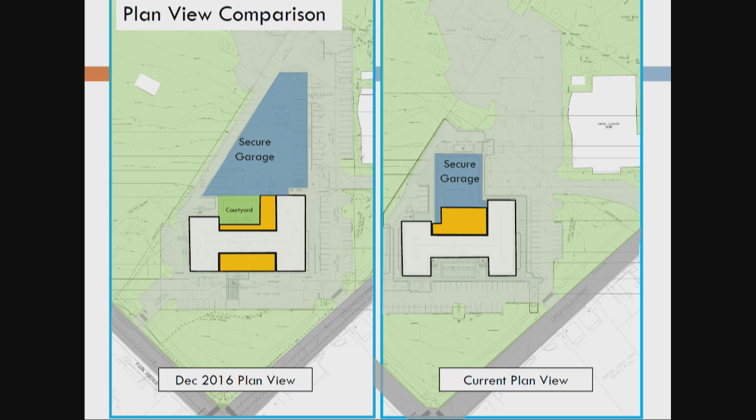So we really do have the current design that meets the original project goals. We haven't sacrificed any of our original safety or security priorities. We maintained the original program, meaning the departmental space needs within the different departments of the city, and also maintained our public meeting spaces, maintaining an open central entrance and central lobby area. We're maintaining this historic city hall frontage and aesthetic because we're no longer adding this addition in the front. We're maintaining these 2 public elevators, and we're minimizing the impacts to Cherry Hill Park. So to reiterate, this newest design still meets the project goals, still meets our current and projected space needs, and is within budget.

Before I talk a little more about the updated design, this is the second round of stakeholder outreach, or third round maybe - this has been a long project. We went back to council to show this concept off on May 22nd, and then we submitted a site plan on the 30th. We had a public safety task force, consisting of public and internal stakeholders, review this building on the 5th. We brought this to the Architectural Advisory Board last night, and we're here tonight, and we'll continue to update the website too.

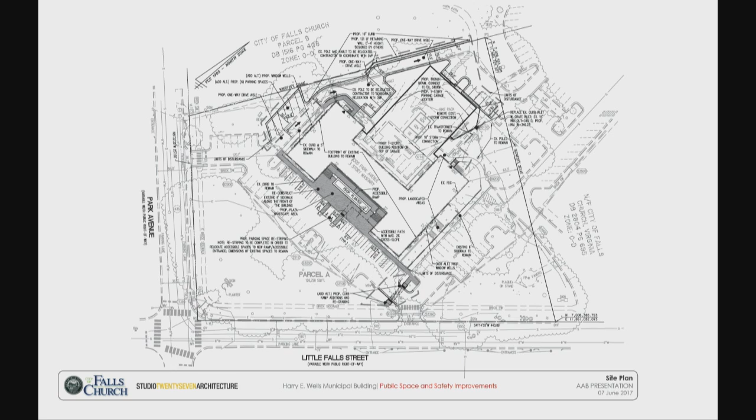This is the site plan we submitted. Here you'll see the existing building, with this as the front. What's happening now is we're adding an addition in the back, which is a two-story building addition, and on the bottom is the parking structure.

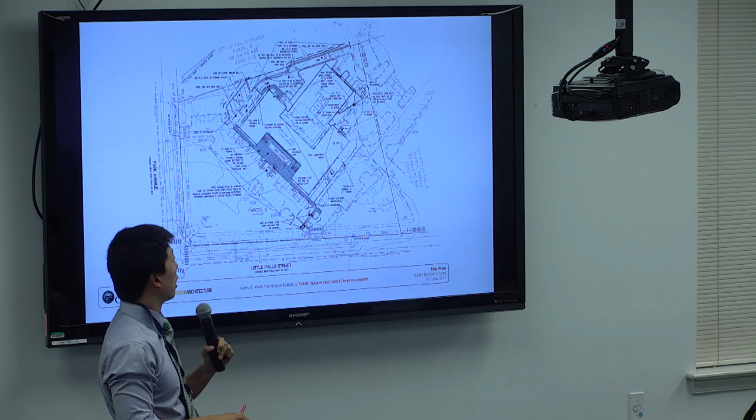The concept right now is to gut the existing chambers area, and that will become your front entrance area where you walk in. Let me see if I have a floor plan. This is showing from an elevation view the rear, and let me see if I have a floor plan.

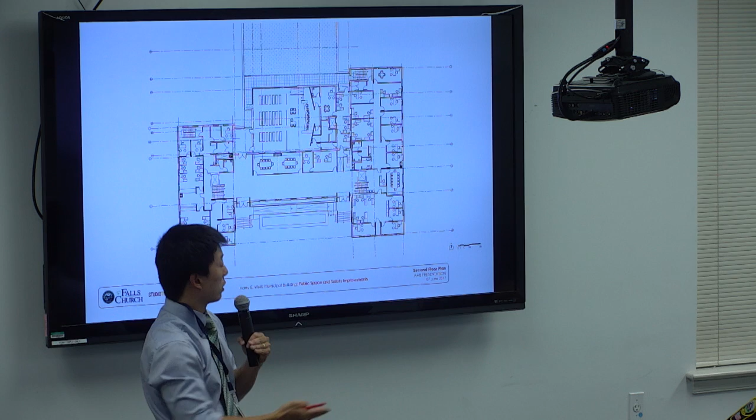To orient everybody, this is the front of the building, this is the floor plan, and this is the rear. This is the existing chambers, which has now been completely gutted—that becomes your central front entrance area. You enter through the existing two front doors into the central lobby area, and in the rear we'll be building a new chambers. That new chambers will also include the sheriff's department and the elevator for secure wayfinding through the building. There will be an elevator back here that goes down to the holding level, for prisoner exchange and judge exchange—the judge can move securely through this elevator.

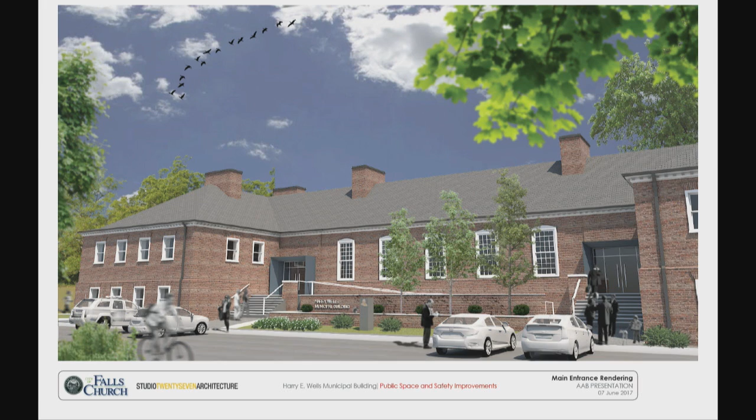So how does this look from the front? Essentially we're maintaining the existing front aesthetic of City Hall—no real change here, no major change. What we are doing is adding in the front an ADA ramp with a short wall to block that from view, and a small seating wall. The existing doorways will be maintained, except we'll update them for ADA width and for LEED, so it's kind of like an airlock system. Otherwise those two existing entrances are maintained.

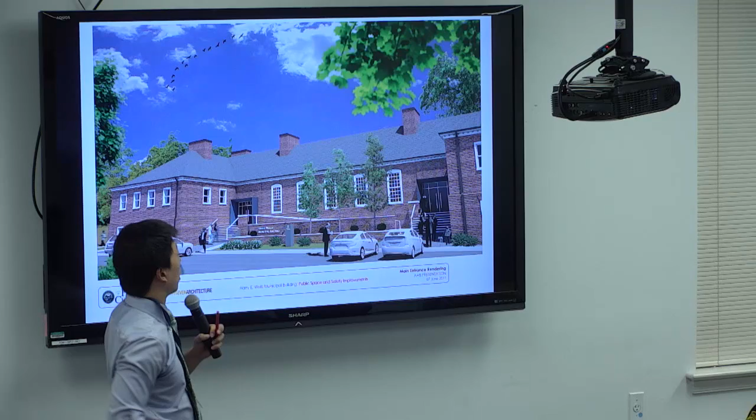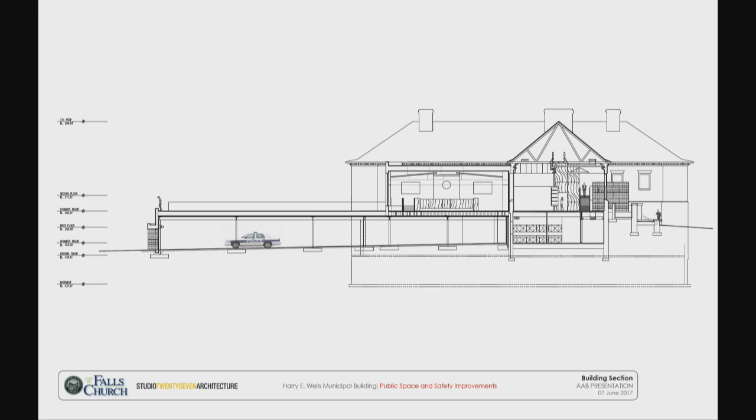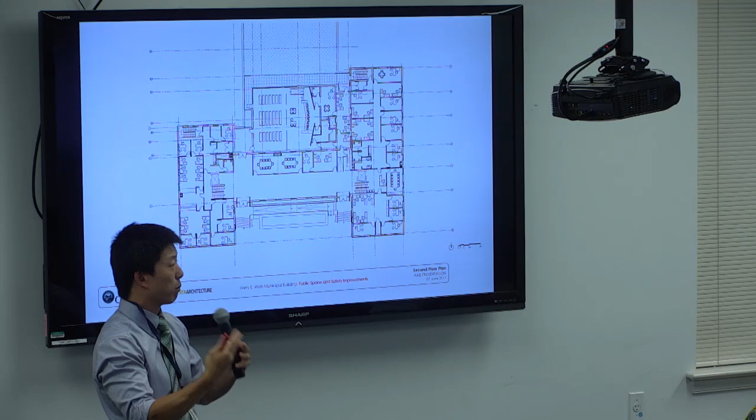Going back to the floor plan, part of this concept is that you come into this lobby area. To your left and right are these stairwell and elevator sections, and directly off of them are lobby areas where the public accessing city services can go up the stairs into a lobby, with your public counter right there—versus what we have now, where you find your way through hallways.

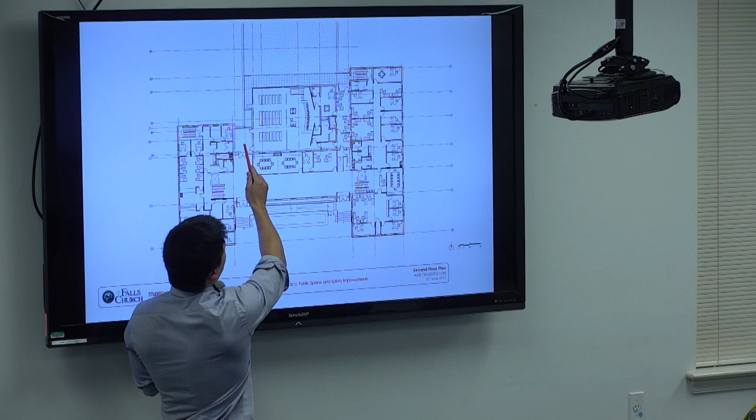In addition, in the front lobby area—I'll flip back to the interior view in a minute—you'll have public meeting rooms right off the front entrance. You'll come in, public meeting rooms right here. If you're accessing court, you'll come in, security vestibule up here, do your security check, and then enter court. This view shows the two public meeting rooms off the front, giving an idea of what we're envisioning for the lobby area.

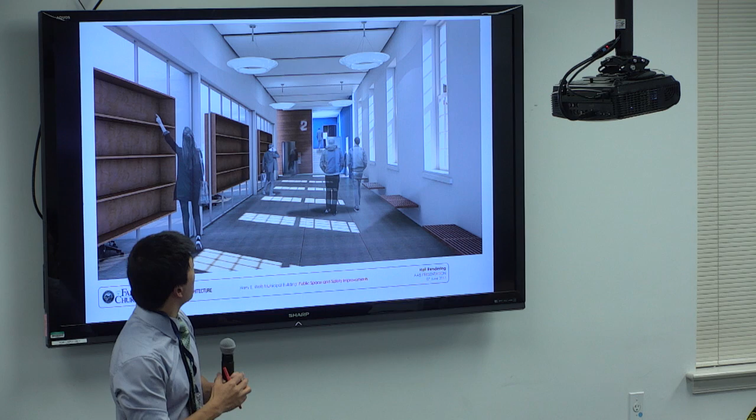And James, if I can note while you're on that one—this is a preliminary rendering, so the finalization of bookshelves, walls, and stuff is still early in the process. This is to give you an idea of what the functional use of the space would be.

So what does this mean? What does it look like in the back? This is the addition that's going to happen in the back, our new chambers, our new sheriff offices, and the transport system that essentially is secure transport for the judges, the courts, and the police.

In the back here, you have a secure garage where the police, sheriff, and judge will be able to come in. That will connect to the Sally port, which connects to holding right there. From holding, you'll be able to take prisoners up securely into court. The judge will also have secure parking and be able to go up securely into court. Everything's enclosed, nothing's like we have right now out in the open.

The top of this will be able to be kind of a green roof terrace area. We see that as being used more as a public space. We're working through how the security and access would work for this top area. Right now, the only access would be through the existing building, so there would have to be something set up to maintain the security of the courtroom while allowing the public to use this. So this could be something like weekends or non-court day use.

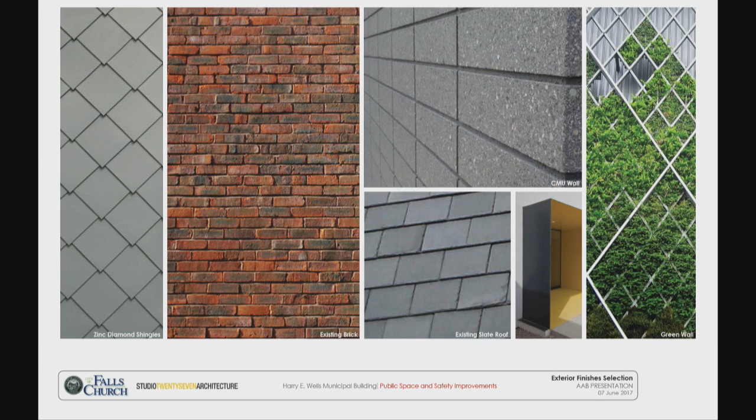What we're bringing into this new addition in the back is things like this CMU wall, a green wall, and zinc diamond shingles, which you're seeing on the wall here, and this would be our CMU wall. We're looking at something that really maybe complements the existing building but doesn't copy or mimic it.

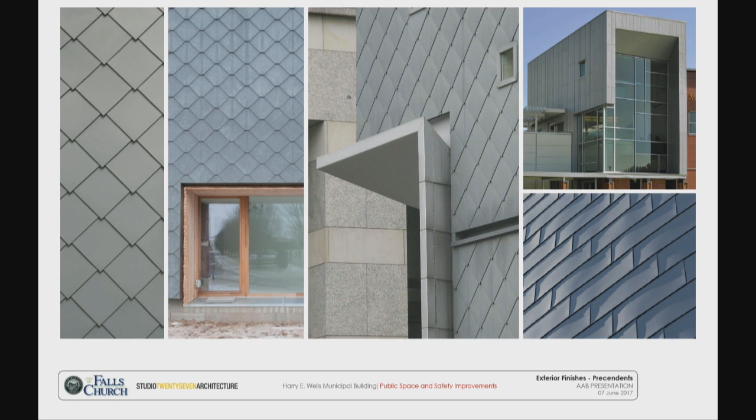These are just a few more real-world examples and different ways that texture on the rear chambers could be visualized or installed. Right now we are going for this kind of more horizontal look that you see here. We feel that matches the brick horizontal.

Then these other elements we're looking at are the framing for the entry doors. We do have to update the doors for ADA clearances and things like that, so what do we do when we're updating those frames? We're looking at something very subtle that will match the existing brick there.

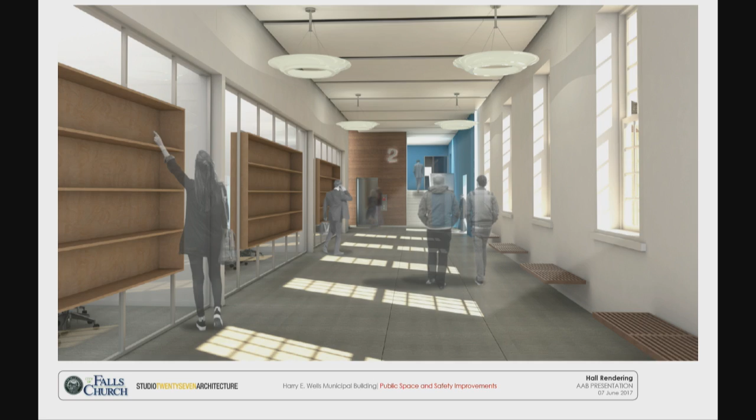At this point, I think I'm done, and I'd like to open it up for questions, or I don't know if Rick or Cindy have anything to add.

The new design has been scaled back some. While we do lose some of the parking spaces in the back, it does retain all the security issues that were brought up and addressed by the Marshals Service and the other studies done in the past that raised the security concerns to begin with. So while the project has been scaled back, it does still retain all of the same security benefits that we were looking for at the beginning of the project, and it clearly assists with wayfinding.

As far as wayfinding is concerned, currently with all the entrances to the building, our records clerk ends up being a tour guide for part of her time during the day. People will come in trying to find an office, she'll try to explain how to get there, and after seeing a confused look on somebody's face, she'll offer to get up and escort them to where they're trying to get. So this clearly makes a lot more sense, and again, it retains the wayfinding positives that came out with the initial design.

I could either be formal and have you come up to the podium, but I'm thinking I'll try to bring the mic around to people and just let you comment and question.

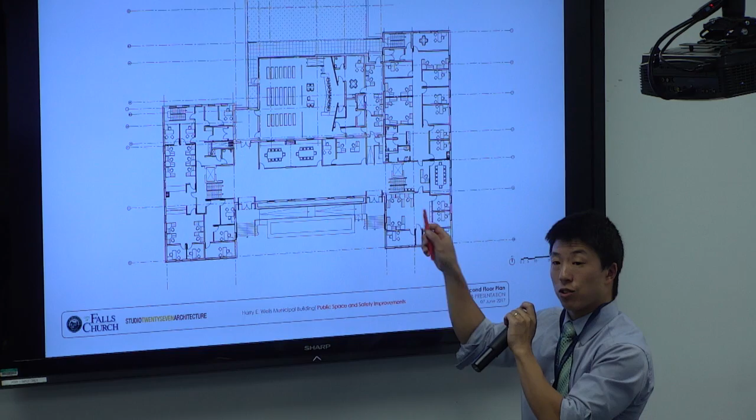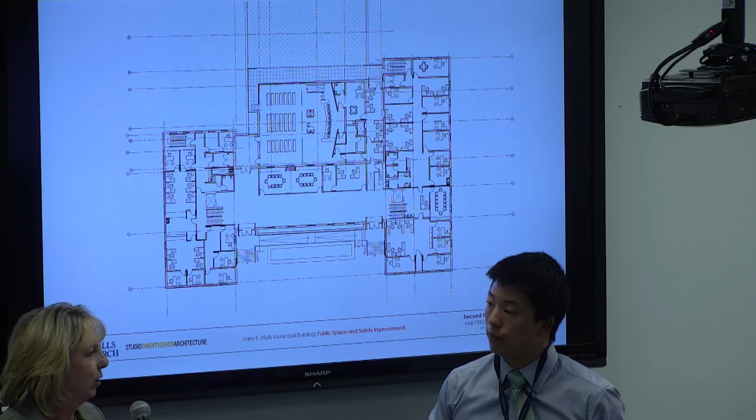Just one final question, what does CMAR stand for? Construction manager at risk—it's a performance Virginia procurement tool that one can use. What happens is you bring the construction manager on board up front at this design stage, so they're really involved. The guaranteed maximum price James referred to is a negotiated piece. The risk part is once they've agreed to that price and the contract's been awarded, they bear the risk for any overruns or anything they didn't project.

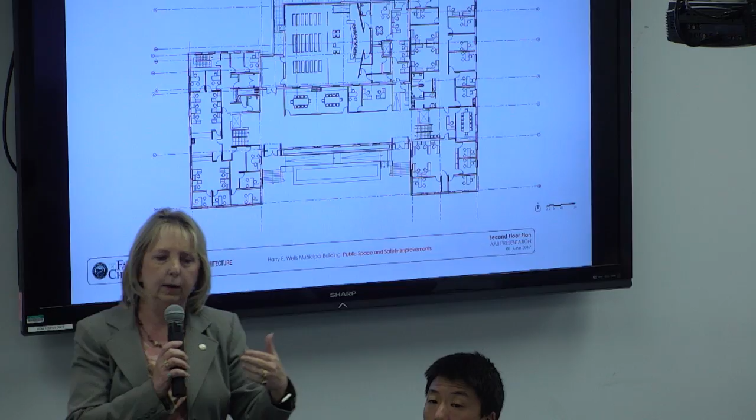So the only change orders are ones initiated by the building owner, because of unexpected things or changes to the design. I do want to follow up on the point about coming down to the police. There would be a lobby and dispatch, and that's for after hours—we're working on the procedural piece. There might still be a buzzer here that the police would see and let you in, so it has a bit of security control. But one of the things with this building design, James talked about lobbies at this counter and some meeting rooms. You can see we have a lot of doors that can secure the suites off, so after hours you control where the public goes, which is safer for the public and also safer for anybody else in the building after hours.

Are there going to be solar panels or other energy-efficient, environmentally friendly things in this building? Sure, yeah, so we are doing LEED Silver as council policy requires. We will have more efficient HVAC systems, more efficient lighting. As far as solar panels, that's just not in our budget right now, but I think overall the operational costs of this building will drop because of the updated equipment we're putting in. We've gotten some additional estimates through the Environmental Services, Sustainability Council—new name—so they could see what we looked at with some vendors, what we could do for solar panels. The back is not where the sun is, so it's a little harder to do that, but they've come up with some options if we can pursue a grant or separate project. We wouldn't preclude that, but we'll be sustainable in many ways, just no solar panels initially.

Great question. Yes, let me go to John. Excuse me, I have a problem with my voice right now.

If I understood correctly, in October the town hall meeting for the original project had an estimate of about $13 million, and then in 3 or 4 months it went up by about 50%. Could you explain why that happened and when the city council found out about that change in cost?

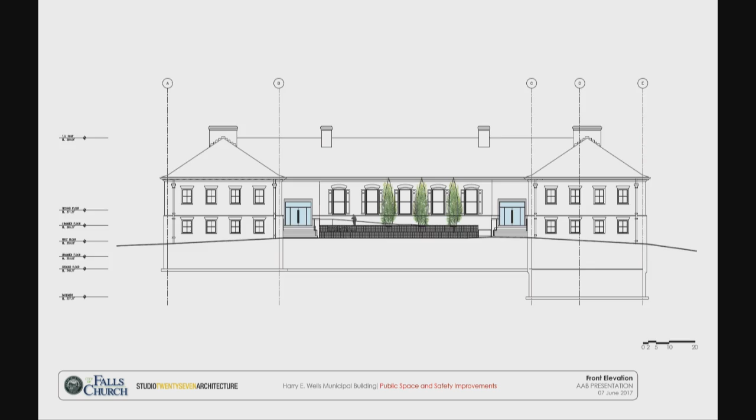What's majorly different is that you'll have a direct line. So now if you can do the floor plan. Here, if you could point to the direct - so now you have a direct alignment to it, and visibility. So it's a much better wayfinding and a direct axis alignment, but you do still have the half up, half down, and only the meeting room space and economic development office on that floor.

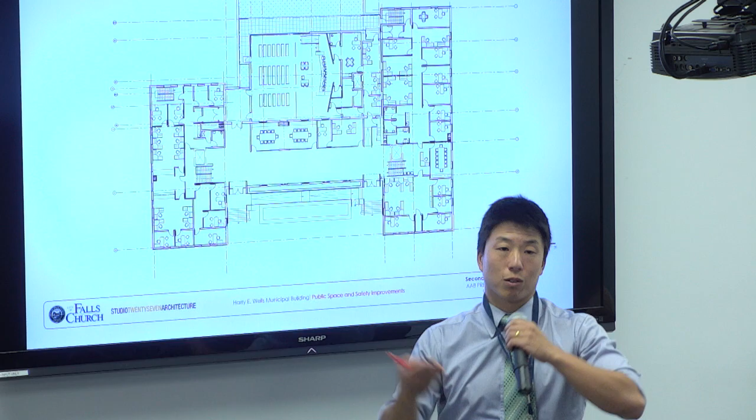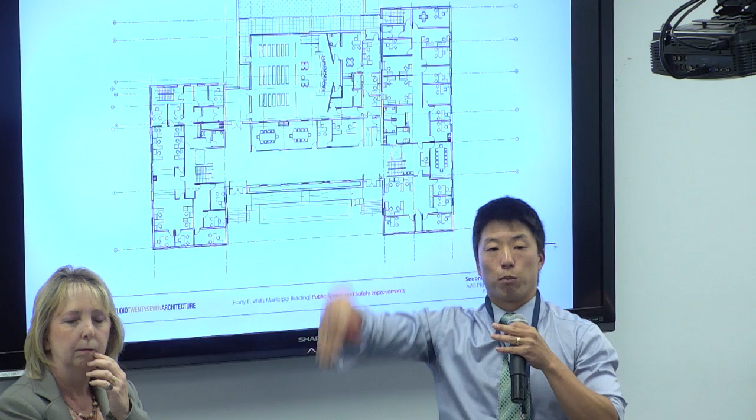You get to either end, and at the end, it's only a half up or half down. That's correct, instead of having to follow underneath each other. And that staircase will be open, it won't be closed as it is right now - you'll be able to see which way you're going.

So see how this is much more open, and we're also trying to use, with the architect's help, some different wayfinding means. So each floor will actually be a different color. So when you're standing, you'll see blue, and then you'll see green, or you'll see yellow, or whatever. And so it helps with the intuitive wayfinding.

The other thing that James talked about is this is now a direct connector between the wings, but we also will still have this corridor. So instead of one connection between the wings, we'll actually have 2, and that'll make it much more efficient. So we're keeping the half floor, but a lot of the staff actually go around instead of straight back and forth - big difference.

And a lot of our staff, if you ask them when they give directions, they will escort, or they'll say it's much easier just to go outside and walk around, because you can't tell citizens how to do it if they don't know the building. That remains the same regardless of the old or new version of the design, right?

A couple of questions about deadlines. First of all, has the courts given a deadline for when we have to be compliant with their demands for court facilities? The second one is, how long does the cost hold? That solid cost that you were given - does that last a year, 6 months?

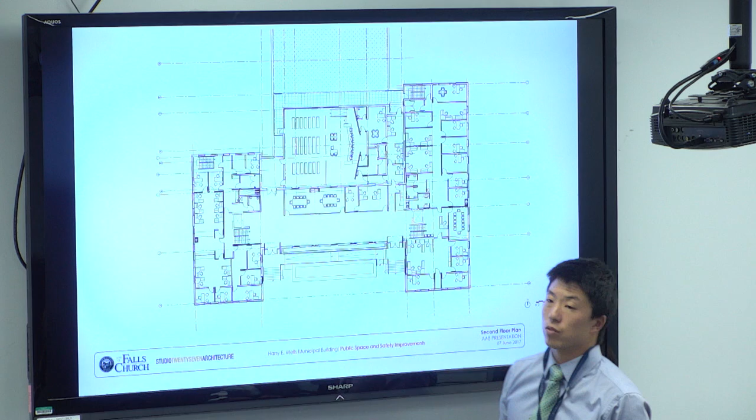Also, we're going to redesign chambers, which we didn't really get into a lot of details. There's going to be only 2 levels now versus the 3. And so the center conference table, which we have now, will be there again. And it can be a meeting room when the large meeting room is not happening—it can just be a smaller meeting room.

And then off of each of the lobby areas on each floor, we are targeting—and the one on the left doesn't have the right design yet, which is always why it's scary to put out floor plans before we finalize them after we just got some input.

We're planning to have in-suite, quote-unquote, conference rooms. So when a developer comes in to meet with DDS, for example, there's a conference room. We're also planning for a lot of the offices that have people bring in plans to have space at the counter, or a little room next to it that you could go off with an applicant who's filing a permit with a set of plans to look at, so you're not all crowded at the counter.

So we're trying to accommodate much more that public engagement interaction in the course of doing business. And we still will have a meeting room on this floor.

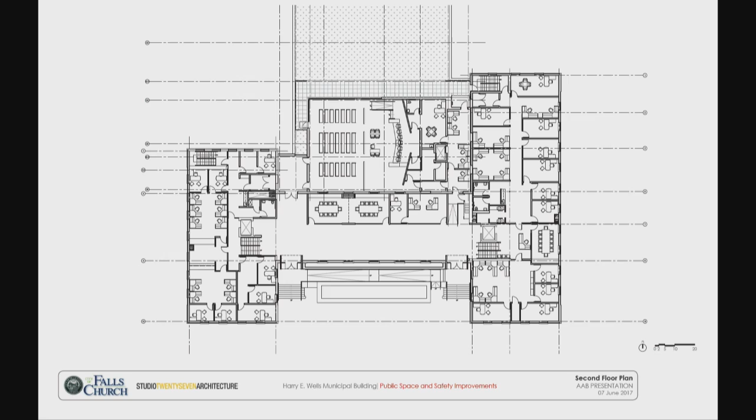Sort of half of this, but square in size. So then we'll pick up another one that we don't have now.

Anything else to add on the meeting rooms? Yeah, I think the general concept is, the way that we've built some of these in-suite meeting rooms right now, they'll be located very close to those stairways and elevators.

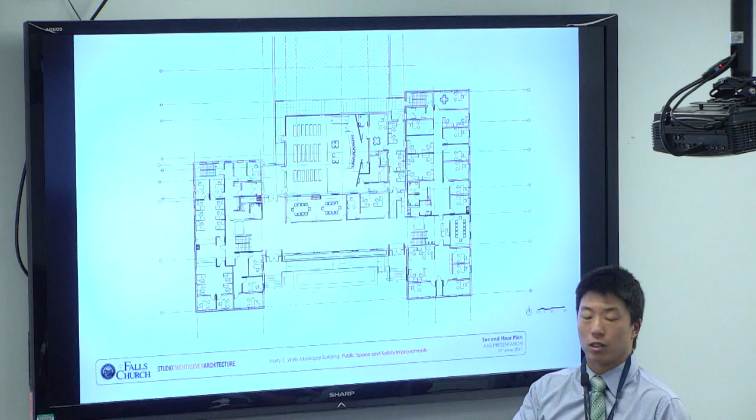So, kind of like Cindy touched on before, after hours you could be able to restrict these staff areas, but the public could still access these meeting rooms. So that really, in effect, allows a lot of these meeting rooms that are currently tucked back into staff areas to be open during non-staff use hours.

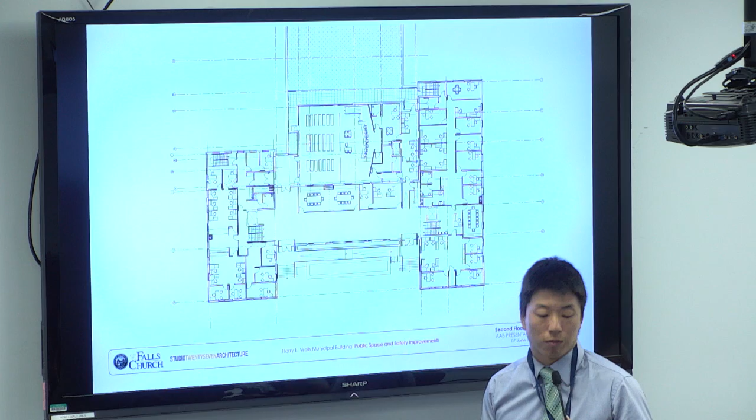And a lot of those, as you all know, in this room have staff liaisons supporting the boards and commissions, but it'll still be more central in wayfinding.

Did you say you had another? I did.

It's not really a question. I really want to make a point to support another point I made earlier, which is I think we should go back to the old design and find the money.

I'm in City Hall probably a lot more than most members of the public because of my business. Over the years, I've seen people—we have a pretty good staff here. I mean, these are pretty highly educated, pretty motivated folks. I see them in closets, I see them in hallways, I see senior staff people sharing a space with 2 other people.

It doesn't seem to me to be the right way to do things. The public in general, I think, expects a great deal from the folks working in City Hall. And if we're going to have those expectations, I think we have to have more respect for their privacy, for their ability to get their work done. I don't think this new plan will do that. So again, I would simply say I'd love to see council go back and consider a reversion to the old plan.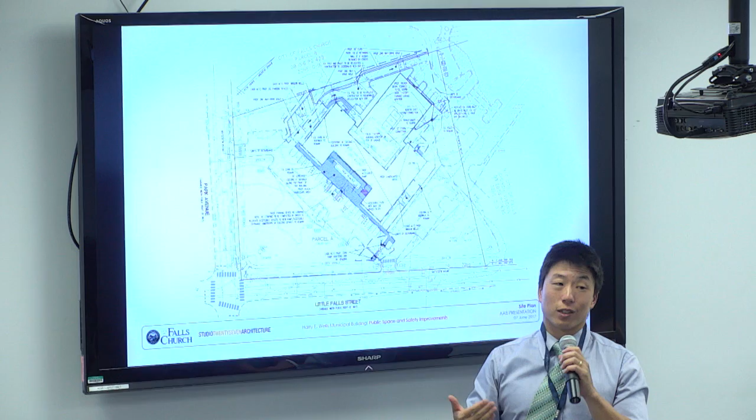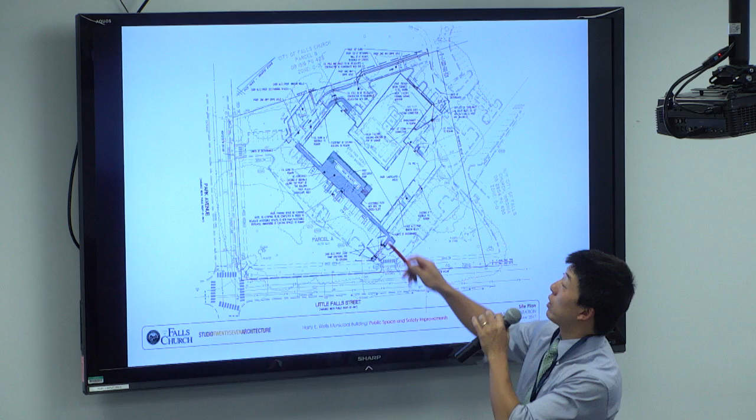Right, so this is our site plan right now, and part of the impact of meeting this budget was that we really had to reduce the site work down to a bare minimum. So in terms of parking for the rest of the site, outside of this very basic building footprint, we're not touching any of that. What will change, though, is that this existing drive aisle that comes out this way is now going to be going in this way.

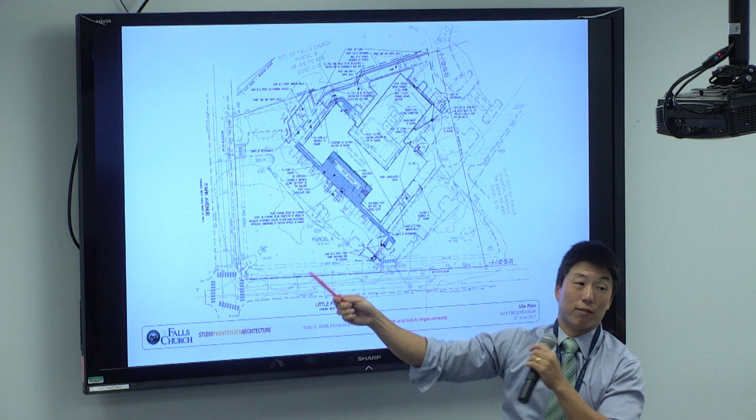And we will have to bump out this drive aisle here to make room for the corner of the garage right here, so this drive aisle in the back will be rebuilt. Other than that, it really lines up to the drive aisle back here, so it's not like we're bumping out into that existing green space right now. It just doesn't go out that far. So that's really the only major change.

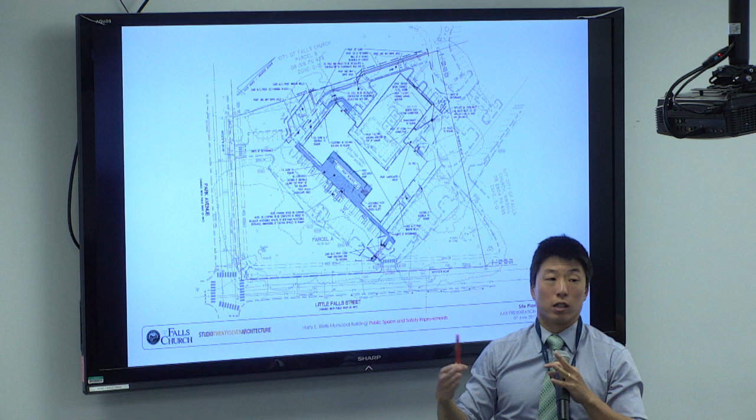And then, of course, we'll have the secure parking in the back, so that will have to be redone a little bit to accommodate that. And then on top of that, we have a few kind of police or sheriff reserve parking around the campus, so that would all move now into the garage area, and that would free up quite a few spots around the general campus.

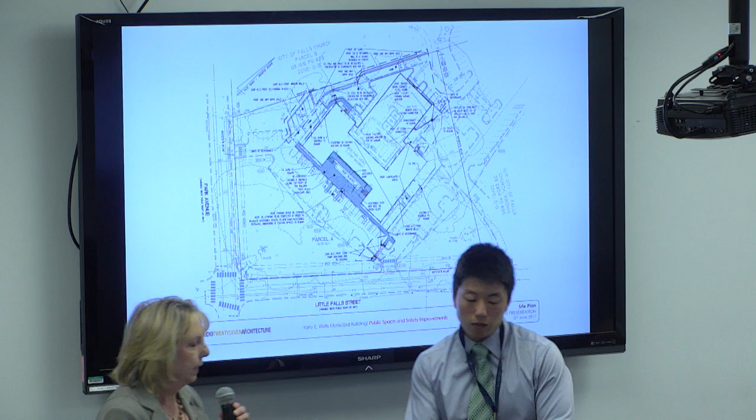One of the things we're looking at is that if this is now the new central front entrance, and you don't have to have public going in and out, this becomes public parking, and our city vehicles and staff will go to the back. The handicap parking will move to the center because it's now with the ramp, which is much better than here, and the only accessible route is there. So we will be doing that.

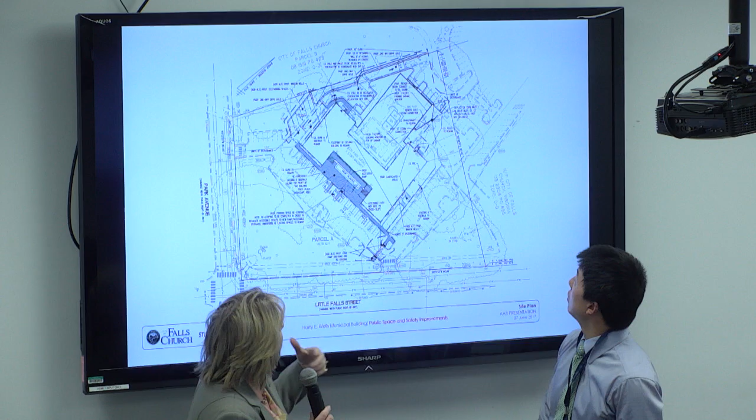Now, we have looked, as a sort of separate project, and working with our development services and public works directors, whether we can do any restriping and improving of the rear to pick up additional space without a large, big project. We're looking at that, so we are trying to improve that.

And then one of the things we're also doing, since we know that we've got parking for the police, the sheriff, and the judge in that secure area—not only 13 net new—we're also looking at what can we do to change the mind shift and the mode share, which is the long-term goal in the mobility for all modes for the comp plan. So the point of doing, for us, what we ask developers to do, we're looking at what TDM opportunities we can pursue. We are proposing in the draft plan, which will be coming out to the community for input, to have a bike share location on this campus or pretty near to it, so we can encourage biking versus cars. Can we carpool more with our fleet vehicles? Can we send inspectors out on a bike? I don't know, but we're looking at those items too.

Yes, I wasn't here, but am I correct that the community center and the parks will not be changed at all?

You are correct. I'll say that besides my nod so it comes on the recording for TV. I have one follow-up. I'm told that I should ask about the library parking. So if that didn't get on the mic, the question was to ask about the library parking.